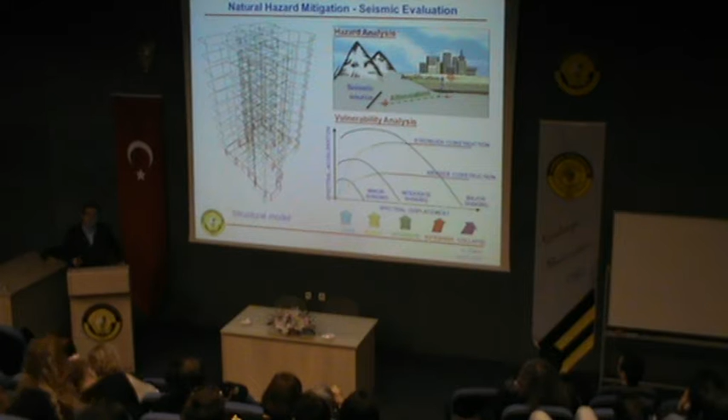The vulnerability analysis shows that if it's a weaker construction, it gets damaged or collapsed under even moderate earthquakes. If it's a strong structure, then only strong earthquakes can damage this. So what you do is you develop the model, and this is when you apply the load, this is the distribution of damage in the building. These are the color-coded damage levels, and this is the capacity, that's the demand. If you get the intersection, that's your performance. If you have an intersection, that means it is a valid performance level, so it's good. If you do not have an intersection, that's pretty bad.

Okay, so how do we cure this? When I looked at the methods, there are the conventional techniques. There is the so-called jacketing of columns. You add to the existing structural members of buildings, enlargement of walls, addition of new shear walls. Shear walls give additional shear resistance to a building. And innovative materials and techniques, these are FRP materials, fiber reinforced plastics, a pretty important class of materials.

That is up and coming, and the supplemental energy dissipation and structural control, these are devices, specialty devices, that can be used in buildings for seismic protection. And those were base isolation, supplemental energy dissipation, active structures, and semi-active structures. So, I learned about these, and I'm eager to go back to Turkey and apply these on site.

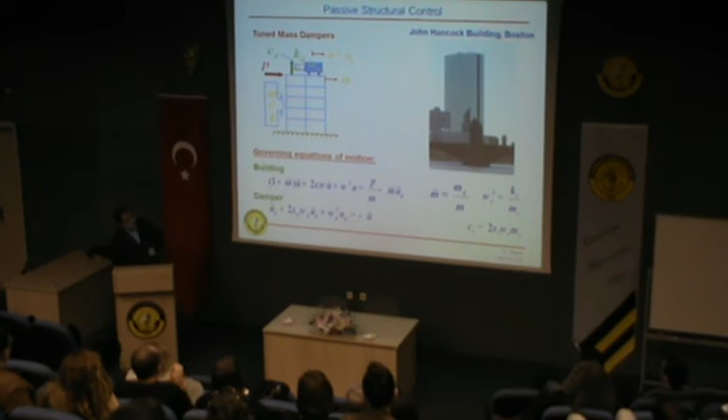And these are the conceptual illustrations of the seismic control and dissipation devices. This is what it looks like, and the damper, just like the shock absorbers in your cars. We use them in buildings too. And these are passive control devices. That's John Hancock Building in Boston. Specialty devices that you tune to resist the earthquake. And there are some active ones that calculate the vibration, sense the vibration, and counteract to the vibration characteristics.

I learned about these, and I have to go back to Istanbul, to Turkey, Istanbul specifically, and apply these. So I came back to Istanbul. I set up a company while at the same time doing my PhD, and I started doing retrofitting work. This is, if you're familiar with Istanbul, this is in Bebek, the faculty housing for Robert College. It's right on the Bosphorus. There are strict regulations about it, and this is the model of the building.

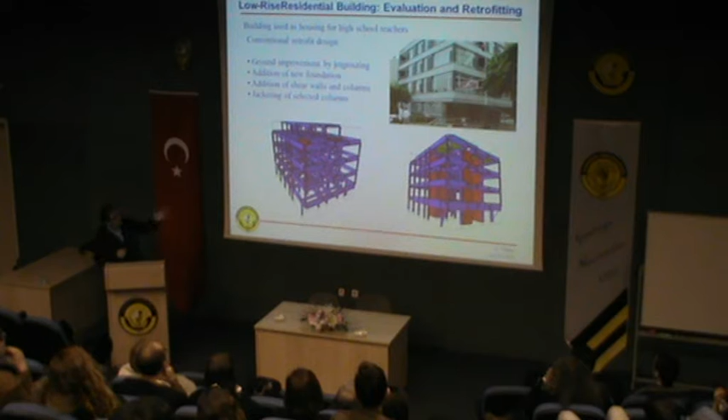And we added several shear walls, and this is the application that we did. That is a shear wall up there. These are additional foundations, and columns are enlarged. As you can see, they are in pretty bad shape, and then there's some additional structural elements. And these were all done without interfering with the front view of the building, because it's the Bosphorus, and you know there are very strict conservation laws, and all that was taking place behind the scenes inside the building. And this was completed within 3 months while the school was in summer vacation.

This is a large industrial building in the Organize Sanayi Bölgesi, Dudullu. And that is more than 20,000 square meters. And this is the inside of the building. It is a pretty dumb designed building, and I will show you why. As you can see, the main beams or girders. I mean, you know, the definition of a beam is that its aspect ratio is, if its width is 1, its height is about 2 to 3, 2.5. That is the definition of a beam.

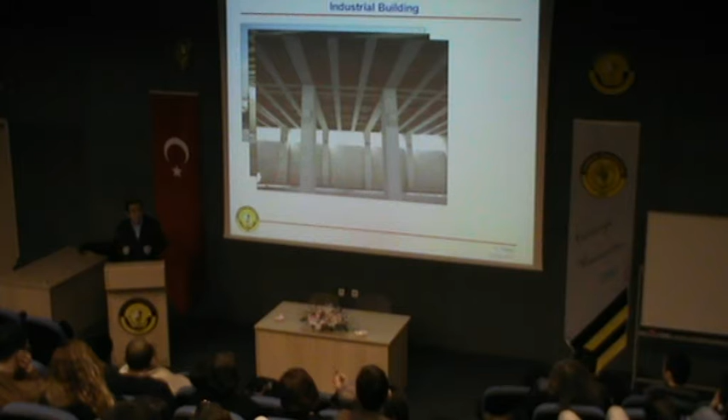But these beams are 1 meter wide by 1 meter high. So that is one of the most ineffective ways of designing a beam, because when you make the span 22 meters long, the beam cannot carry itself. It gets too heavy to carry itself. So there was a huge problem, and it gets pretty ugly looking too. And this is how we retrofitted it.

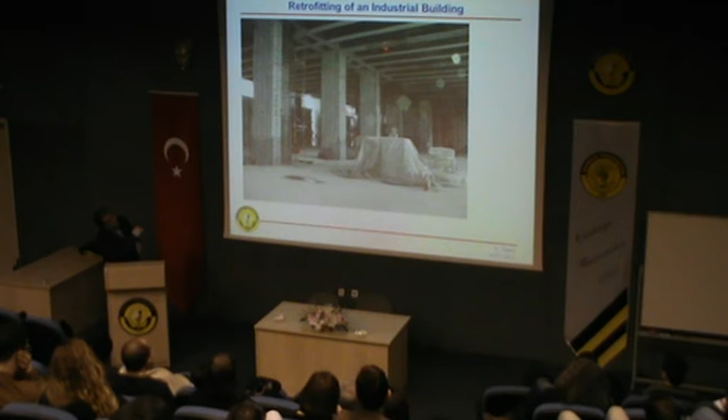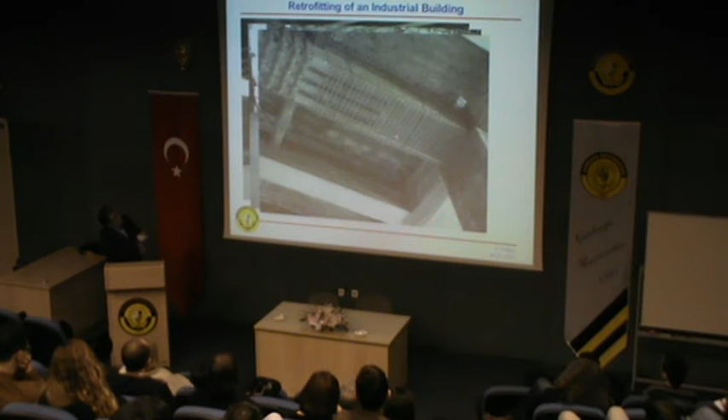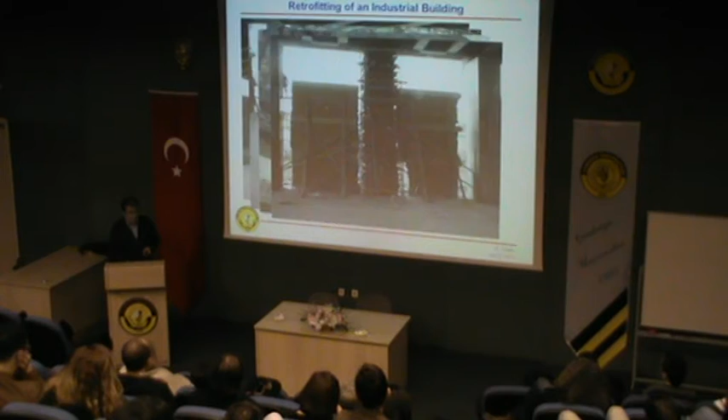We first built shear walls around those very large columns. This is some of the reinforcement, and we added steel reinforcement to the beams. These are pictures from application. As you can see, it is pretty dense reinforcement, and this is in order not to add more weight to the building. This is the reinforcement, and these are steel plates to keep it light. And these are pictures of application. And more buildings in Istanbul.

I did a pretty high number of condition assessments or seismic performance evaluations. And this is one from 2000 to 2003, when performance-based evaluation and retrofitting was not known in Turkey. Now it is, after 10 years. The problem was, when you have your building checked, they say, okay, 50 of your beams and 30 of your columns are substandard. So what does that mean? We don't know, but they're substandard. As the building occupant, you want to know, am I under risk? Is this building going to collapse under a seismic event? We don't know. We just know that so many of your building's members are substandard.

So this performance-based evaluation tells you, through a performance measure, whether your building's performance is satisfactory or not. So in those days, this was a novelty, that we were able to say, okay, so many of your columns and beams are substandard, but you're under no risk or limited risk or high risk. And that meant a lot more for the building owners.

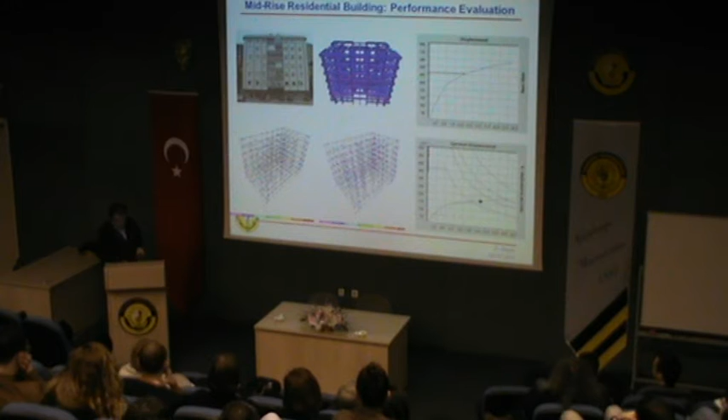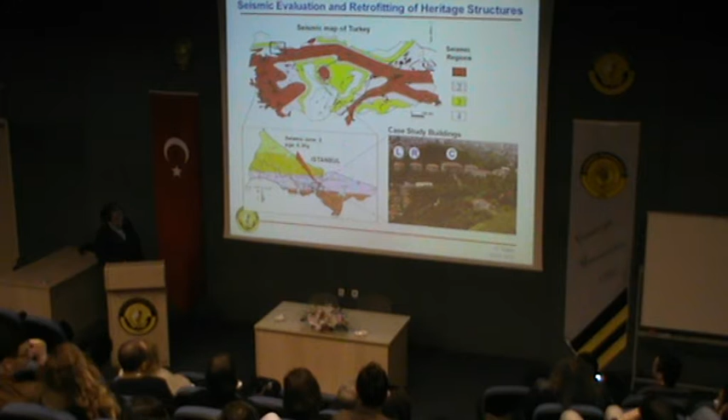And this might be interesting for you. These are the Robert College school buildings. Of course, they have historic value, and they are in the second-degree seismic zone. And they asked us to perform the seismic evaluation. The structural design of the buildings is quite interesting. On the inside, it is steel frames, a steel floor frame system for resisting the gravity loading. And around the perimeter of the buildings, there are thick concrete walls, but they have no reinforcement in them. Plain concrete walls to resist the earthquake loads.

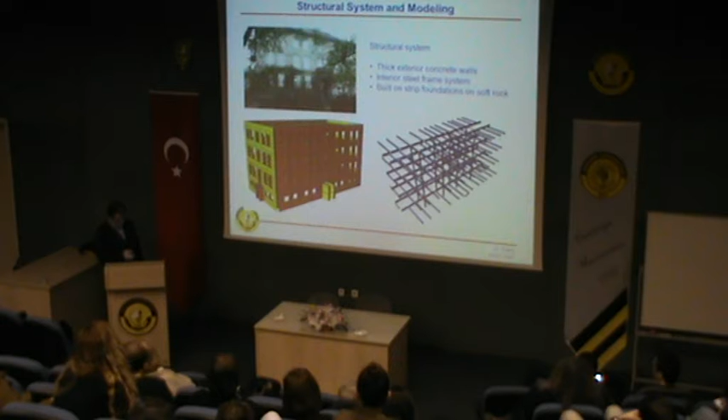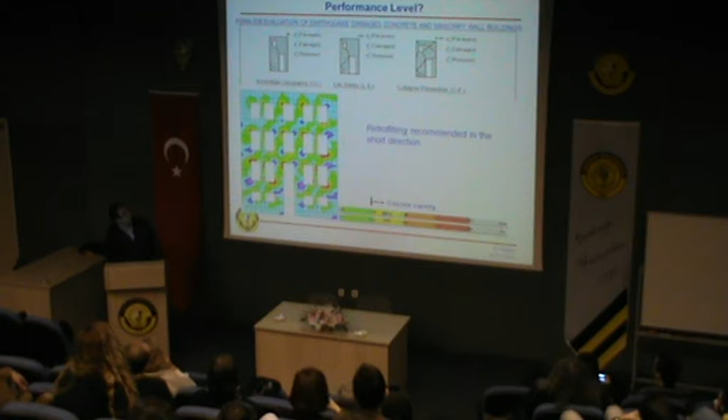So we said, okay, we have to retrofit this building. Now, how do you retrofit a historical building without interfering greatly with its architectural character, historical character? And we studied a number of methodologies. One of them is center coring, going through from the roof down to the subsurface and anchoring the building and putting it under compression. What else?

Base isolation, putting isolators in underneath the building so that when an earthquake comes, it's not damaged. What else? The FRPs, you cover the building with these materials, and since they have an architectural value, not the best way. So we thought of an innovative idea. We said, change the window frames with structural steel. They have the windows, so we will change them with structural U-shapes.

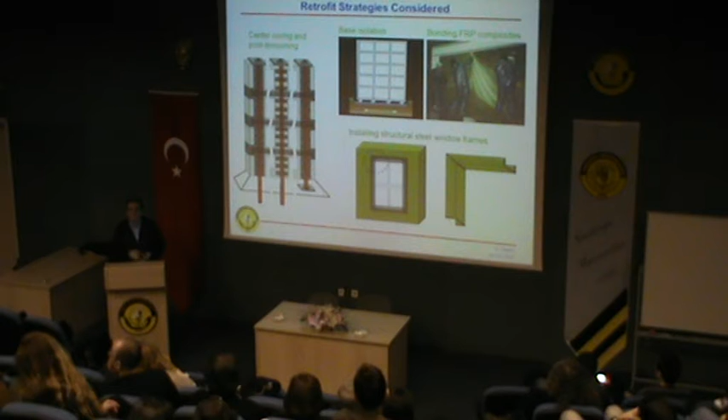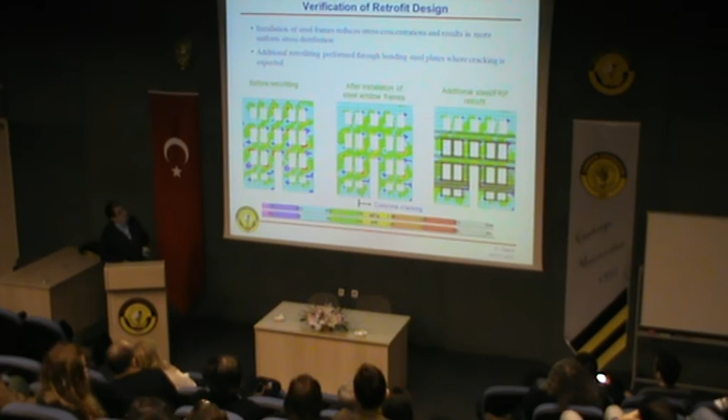I have a problem with it. U-shapes will make the building not feel these openings, because the problems are because of these openings. And the base isolation was way too expensive for this. And we implemented the analysis, it looked fine, and we did the retrofit application. And this is what it looks like. So that is after the building is retrofitted.

And then, as an architect, I don't know what you think. We have interfered with the architectural character of the building, but not in a major way. And this was all done within the summer vacation as required by the client. So you can say that it is a good application. Well, there's one problem though. This is structurally effective, that's for sure.

These are the structural steel window frames. These are the steel plates. They are all tied. Now it's a safe building, for sure. But success has its types. Although this was structurally a successful application, from functional use perspective, it wasn't as successful. Why? Because, as you can see, these window frames are surrounding the window, surrounding the wall, so it is in contact with the exterior and interior of the building.

And later on, as they started using it, they said it gets too cold. The students sitting right next to the window cannot get warm because that steel takes the cold from the outside and brings it inside. So that gets you thinking. There are many levels to doing design.

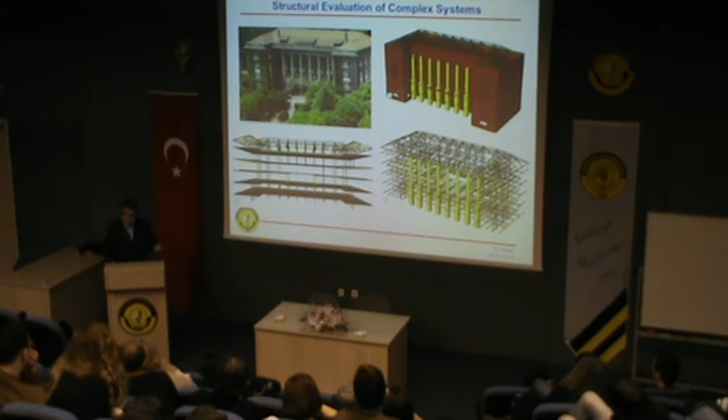So that doesn't give you much confidence about the engineering business. So that obviously shows us that we need some more reliable tools. The reason is, I have these stresses, but this is due to elastic analysis. Once the concrete cracks, the system is not the initial system anymore. So how do you deal with that?

When does the building collapse? That's the question that everybody is looking for. When does it collapse? In a 7 earthquake, will this building collapse or stand? But you cannot give that answer with this kind of analysis.

So while I was doing this, I saw that my PhD is going nowhere if I work this hard. So I decided to go back to MIT and finish my PhD. I was forced to do it. And I had problems with the business too, because at that time the code basis was not there, and the market, perhaps it's a bit better these days, but it was a mess.

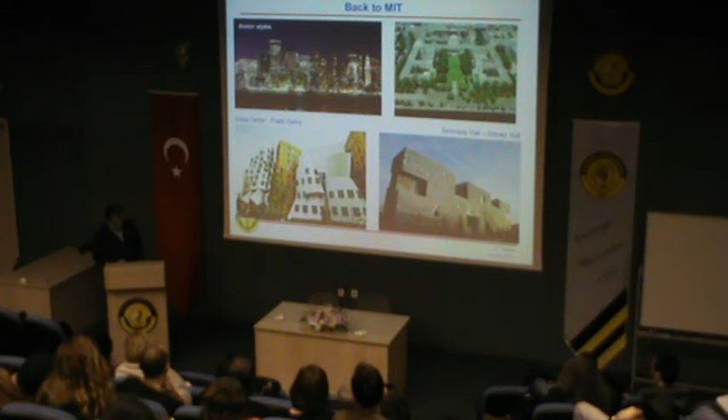And the one on the right is one by Steven Holl, and that is like a more porous membrane type of structure. By the way, the one on the left cost $300 million. And after $300 million, when it was in service, the roof leaked. It happens. And this looked like Lego, so it's a very interesting building. It's a dorm building.

Okay, so I came back to MIT and I'm searching for problems. Now I know the solution. I have experience searching for problems. And this is an interesting graphic that I like showing, done by Professor Ashby at Cambridge University in the UK. This shows the relative importance of materials throughout history. As early as 10,000 BC, the polymers, elastomers, the organic types of materials, wood, skins, fibers, were the main materials, and people built with these. And there was also stone, flint, pottery, glass that they used as building materials.

Now, with technology, there was cast iron, rubber, cement, refractories, Portland cement, just towards the 1900s, and the 20th century was said to be the century of metals. But as we move towards the 21st century, the use and importance of metals is decreasing, and plastics and composites are growing. So there's a somewhat strong consensus that the 21st century will be the age of composites, as it was the age of metals in the last century.

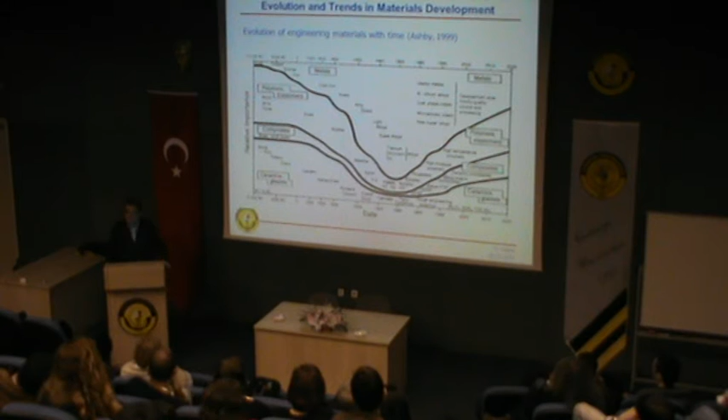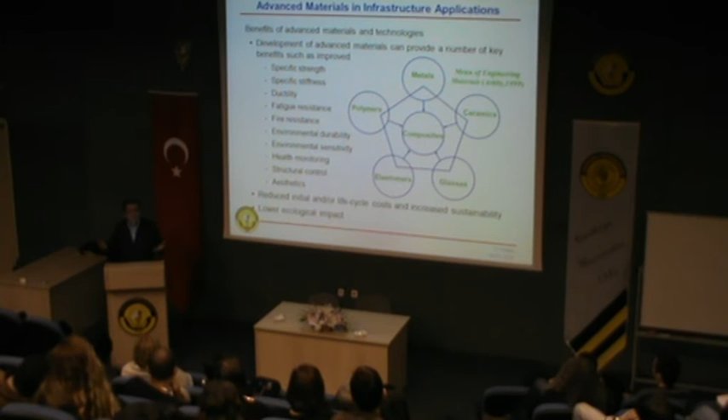So when you combine the existing classes of materials, metals, ceramics, glasses, elastomers, and polymers, you can obtain better properties out of these composite materials than the individual materials can display. And the structural use of this is FRP, fiber reinforced plastics. These are very thin fibers embedded in polymer matrices. The main load-carrying elements are the fibers. The matrices hold them together, protect them from the environment, keep them aligned, etc. And you get very favorable properties.

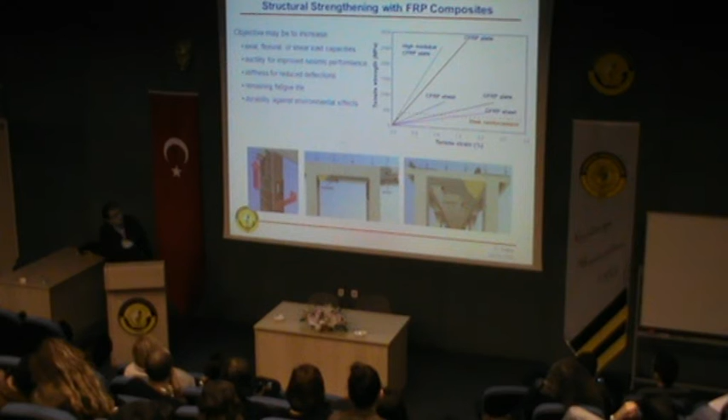In structures, since these are the early applications, we use them for strengthening. So what we do is we wrap, for example. For flexural resistance, we wrap it on the vertical. For transverse reinforcement, we wrap it around. And these are the strengthening applications. These are from past applications, wrapping of columns. This is wet layup, the hand layup type.

This is for beams, slabs, connections, walls, etc. For improving seismic performance, these materials are used pretty commonly these days, well, in the developed countries, I should say. And these are the types of materials. The good thing about these is you can tailor the properties as you want. You can fix the orientation, or you can stack them with multiple layers and make it a laminate and adapt it to your purpose.

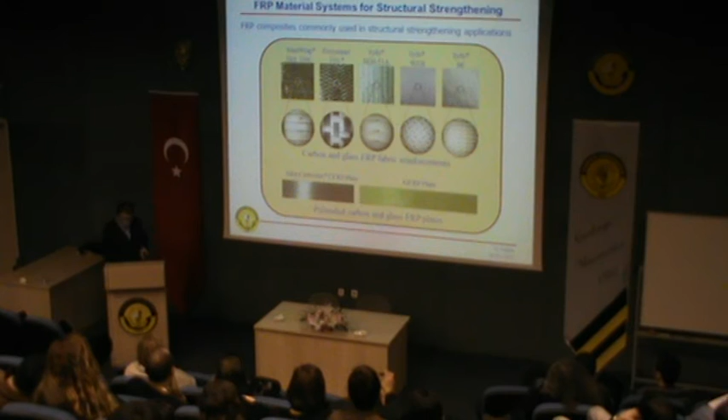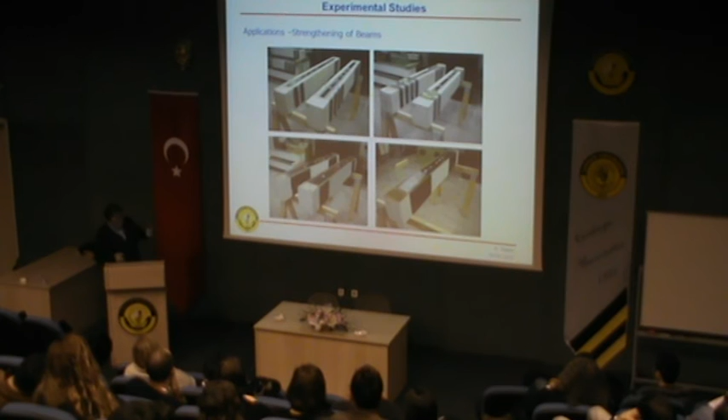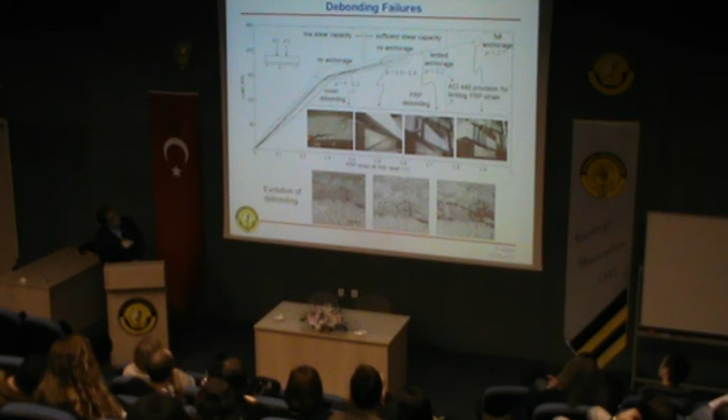And this is from my PhD. I said, there are a lot of buildings in Turkey that need to be strengthened, so I should study this. And this is from my laboratory study. I identified the possible failure modes, and I tested and verified these. I developed an experimental study and showed that the current code is not efficient, it is not conservative, so there's an impact potential here. I showed the different types of failures, the evolution of failure.

I classified those failure modes, did a mathematical modeling of it, matched it with my experimental results, developed a model, quantified the parameters of the model, and came up with this. The current ACI, American Concrete Institute provision, was this straight line, and mine is this, and this is the true curve. So my model performs much better than the existing code. And when I verify this with other experimental data, I get very good results.

So in the end, I have a simple, robust model that takes into account all relevant parameters, and it gives accurate predictions. When I found this, you would think, okay, this is a better model, let's adopt it in the code. No, it doesn't happen that way. You have to go into the ACI committees, because there are big egos serving on those committees, and you have to fight with them and get your model accepted, and after that fight, it may find its place in the codes. Well, I'm not willing to do that because it's not a priority research item for Turkey.

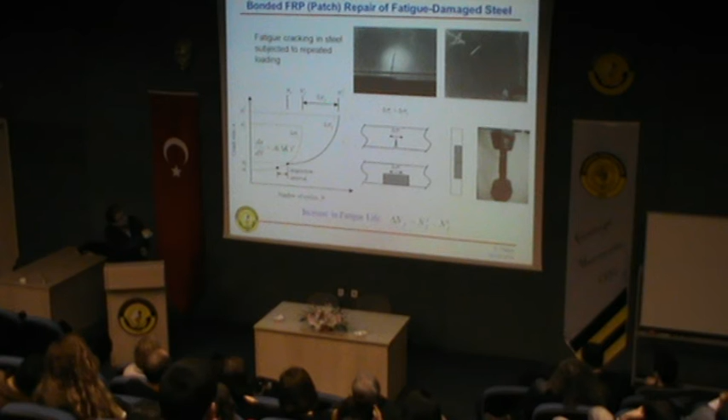So I looked into another problem. It worked with concrete, does it work with steel? Steel bridges have these cracks developing in them. I'm sure there are a lot of bridges in Turkey that are developing cracks. Can we repair them? Without a crack, it may not make much sense, but when there is a crack, if this is the life of the member with a crack, composite patching extends the life to this. Again, after some preliminary investigations, I designed this experimental program. I put notches inside steel specimens and patched them with CFRP.

And these are the test results. Without the patch, it fails right away. But depending on the size of the patch, as you can see, I can improve the fatigue life, that is, the performance under repeated loading, considerably. And the railroad people loved the idea. I presented to them for 4 years, and they said, okay, do some more tests and do the modeling. And we looked at many things: the surface preparation, the material deterioration under environmental effects, how it affects the performance, corrosion, does it prevent or accelerate the corrosion, etc.

And it works out. And this is the non-destructive evaluation, using ultrasound, just like pregnant women look at their kids. We look at delaminations, debonding underneath these CFRPs. It's the very same technology. Well, a bit more primitive on this side, but it's the same principle. So it works. Again, it is not a priority research item for Turkey.

So I finished my PhD, thank God, and half an hour away from MIT, I found a job: University of Massachusetts Lowell, about 30 miles from Boston. I applied for this position because I wanted a university around Boston, I love Boston so much. There were 62 applicants, including me, and it took them two weeks to decide that I get the job. When I come back to Turkey, I will tell you another story that completely contradicts this. I'm coming from Turkey, language skills questionable, but a graduate of MIT, that's a good reference. 62 candidates, and they hire you within 2 weeks.

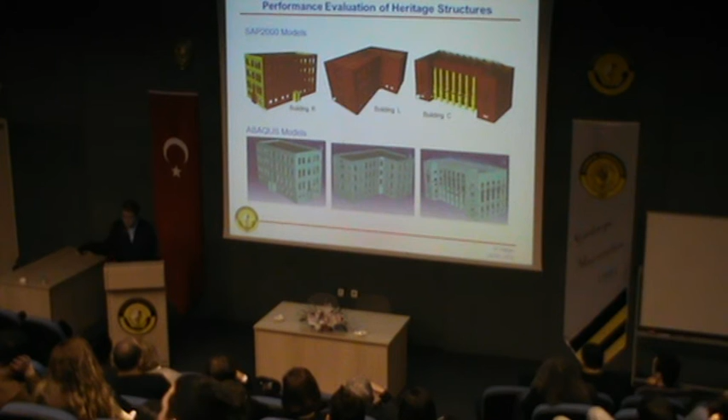So if I were smart, when I started at UMass, I would look at the problems of the US. But since I went to Turkey and saw the problems, I'm still tempted to work on the problems there. So, for that subjective thing about deciding on the performance of those Robert College buildings, I developed a much more accurate model, and I got 2 assistants from Turkey, and they modeled these very same buildings using much more advanced software, nonlinear finite element analysis. And we verified the model.

We used complicated material models that take fracture into account. Fracture is kırılma. It is a very important parameter, and it's not the strength. Dayanım is another thing. Kırılma is a completely different thing. Fatigue is yorulma, just for reference.

Okay, and now I can see the whole nonlinear curve of a building, and that is a blessing. When you have this, this helps you a lot. And this is, let's see if this will work. Now, here, remember that I told you about that third story that was free of columns?

Now, in a linear analysis, it all deforms together. But in a nonlinear analysis, in a few seconds, the potential problem with the third floor will be apparent to you. Now, concentrate on the third floor. It shows you clearly a weakness on the third floor where you don't have sufficient columns. So that's a pretty reassuring result.

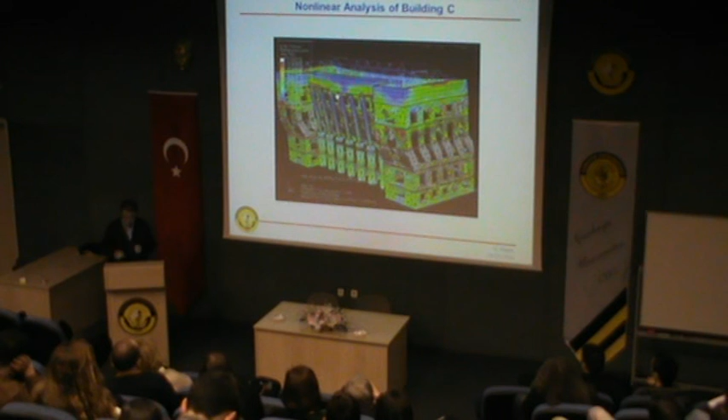And you go back to your analysis and show which ones are sufficient and which ones are not. And thank God, the only one that I retrofitted was not sufficient, which showed that my decision at the time, 5 years ago, was correct. And we modeled the retrofitting. It all worked fine. We have immediate occupancy. Other than that column issue, it works fine.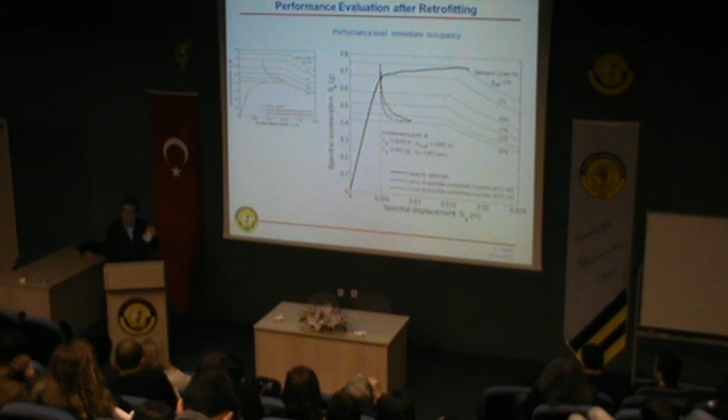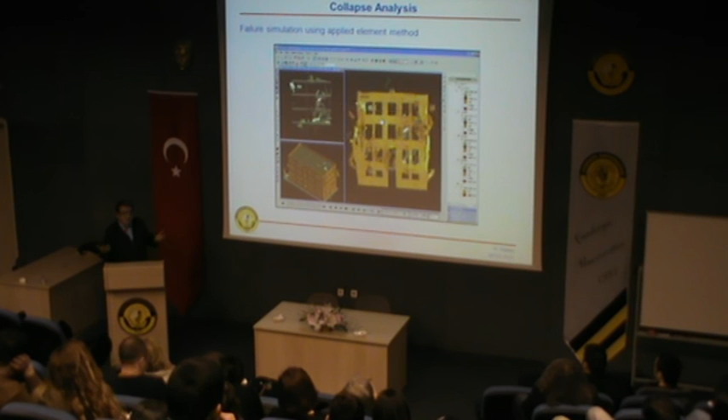So what else can we do? What else we could do was look at collapse of buildings. You know, it's damaging, deformations and this and that. It's all good. But when does the collapse happen, and how can you simulate that collapse is another challenge that needs some more work by the civil engineers to carry out.

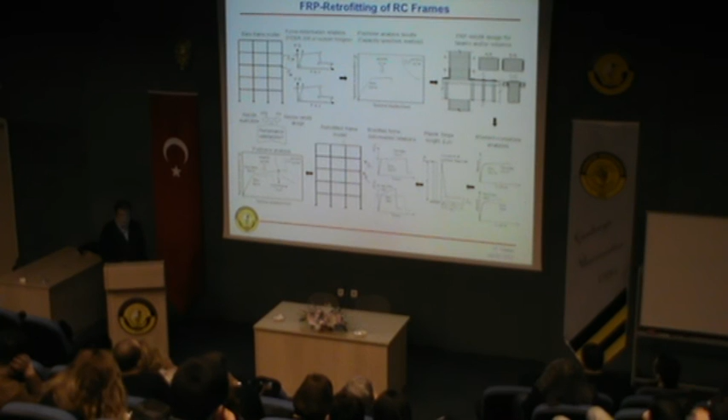Okay, about buildings. If I retrofit them with FRPs, does it work? So another master's student looked at that, and we found that it may work, but we need more help. And this is an original design that I developed when I was in the US. I have retrofitted buildings, and I know that when you retrofit a building, it becomes a mess. Initially you say, okay, I don't want people to move out, and I want this to be over in 2 months. But when you go inside the building, everything is redone.

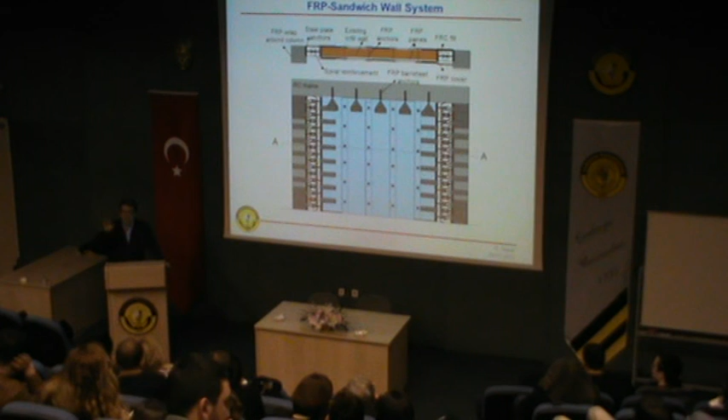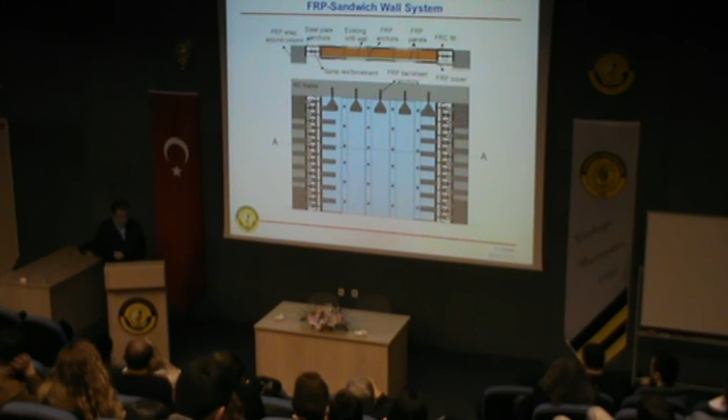So I developed this design to say, okay, I will stay in your apartment just 3 days, and I will be out, and it will be as if you're painting the walls. This is a modular design that makes use of the existing buildings to a large extent. It looks a bit complicated, but it is very straightforward to carry out. A worker can carry upstairs each component of this design easily. So this is something that I'm trying to test, so I come back to Ankara.

I graduated at the top of METU. I did my master's and PhD at MIT. I worked 4 years at an American university, and I'm thinking that people will welcome me here. Oh, this is just the guy we're looking for. Pick your institution, we'll hire you. As it turns out, that's not the case. That was a good education for me.

I went to the region, and this is the typical building type, and this is a paper from 1992 about an earthquake that happened in the 80s. And these are the damage types of the buildings after this earthquake. Now, if you look at the Elazığ earthquake, this is the 92 paper, and that's the 2009 damage. 92 paper, 2009 damage. 92 paper, 2009 damage.

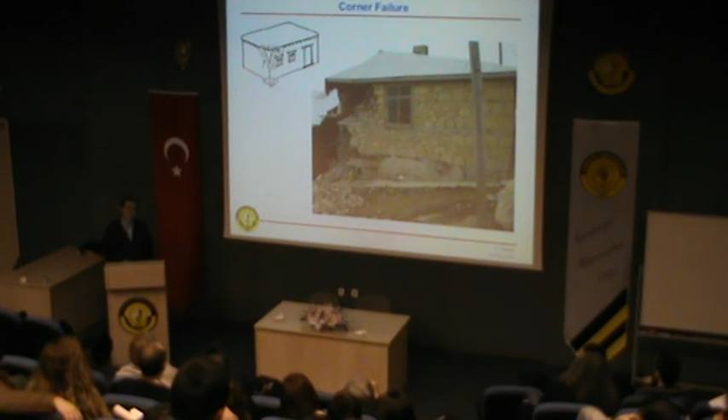In the past 30 years, you see that not much has been achieved in the area. And I searched if people are doing anything about it. Not many are doing anything either. So it's a challenge. So let's take care of it if we can. The problem is, these are far villages in questionable security zones where you don't want your people or workmen to be for an extended period of time. So the solution, if I can develop one, has to be a quick one.

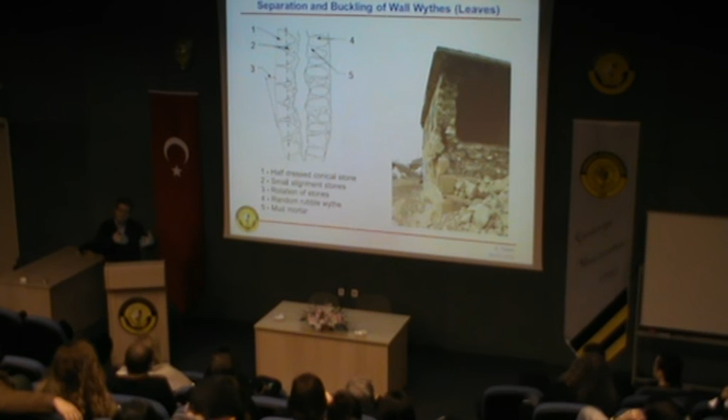If it's high-tech, that's okay, because high-tech is expensive, but if you do it in a very short amount of time, it can work. So my idea would be sprayed composites. The system chops glass fibers, sprays them on concrete with epoxy and with sand, and covers the building surface to give it some extra resistance in shear. Is it feasible? Well, we'll see if it works. And to prevent the buckling of the walls, we are working on developing some anchors.